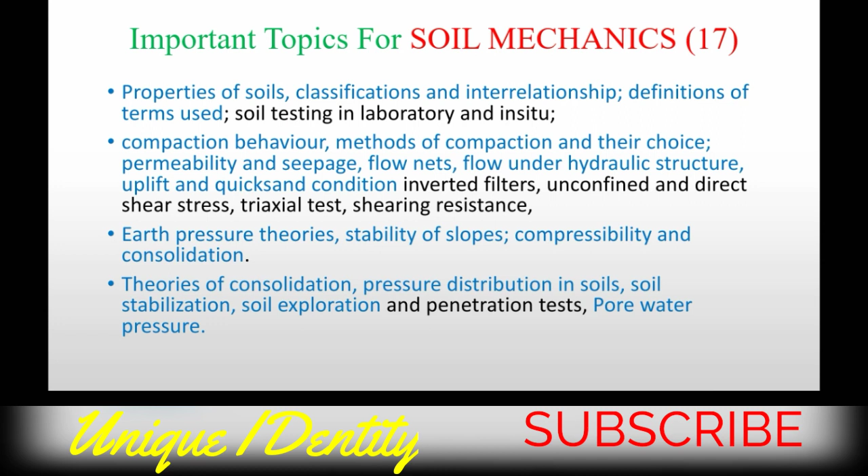Please revise related questions on these topics from this subject. Next is foundation engineering. As I told, soil mechanics plus foundation engineering, total 17 questions may come. So in foundation engineering, foundation type, selection criteria, bearing capacity, settlement, laboratory and field tests, code provisions, types of pile - these are mainly important things. Please revise these topics in foundation engineering.

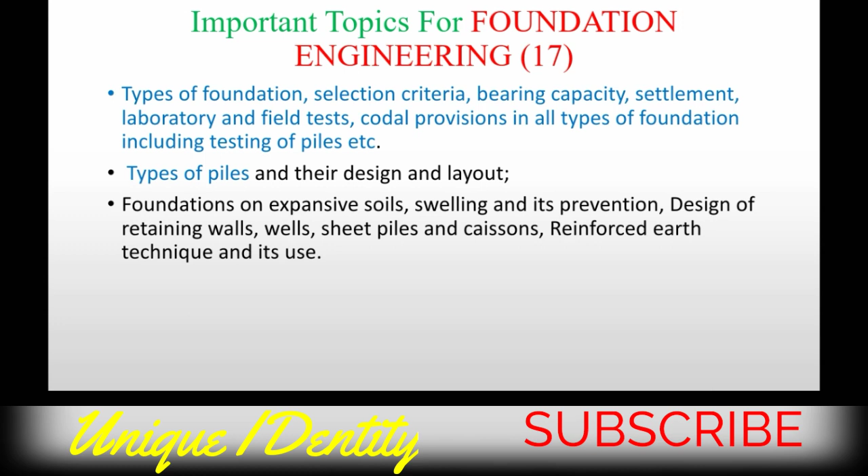Next is environmental engineering. As I told in my previous video, approximately 14 questions may come from this environmental engineering.

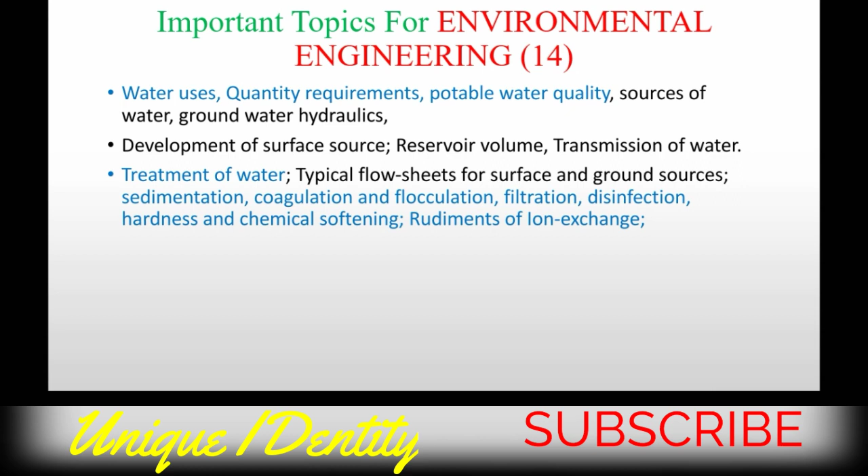First, water supply engineering. Here, water uses, quantity requirement, potable water quality - these are the main topics. Also treatment of water: sedimentation, coagulation, flocculation, filtration, disinfection, hardness and chemical softening, rudiments of ion exchange. These are the main topics for this water supply engineering.

Also principle and methods of design of distribution system, as you know - gridiron system, T system, circular system, ring system. So these systems are mainly important.

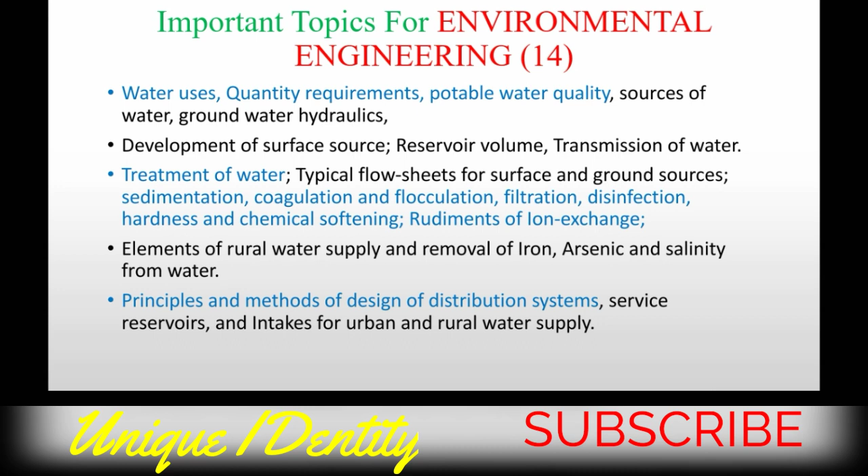Next, another topic is wastewater engineering. So here, sanitary wastewater, storm water runoff, quantity estimation, sewage system, sewer appurtenance, characteristics of domestic sewage, typical flow sheets of primary and secondary treatment, screen, grit removal - these are the main topics.

Also you can read sedimentation, biofilter, activated sludge process, septic tank. Again, I am telling you all these topics have come from the previous years, so mainly from these topics questions may come.

Next is pollution. Type of pollutant, natural and man-made sources, effects of air pollution, unit systems, rudiments of control method, elements of noise pollution, community solid waste, sources and quantity characteristics, method of disposal, reuse and recycling - just like composting, sanitary landfill, incineration. So these are the methods of disposal. All these are important for environmental engineering.

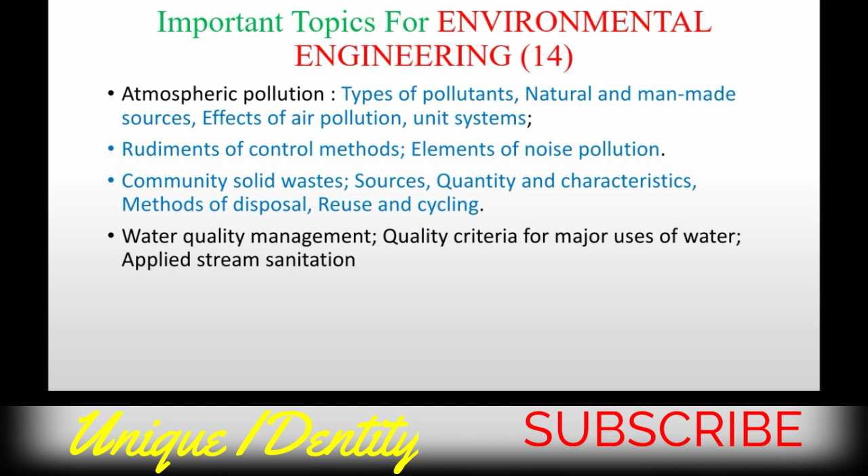Next is water resource engineering. As I told you, approximately 10 questions may come from this water resource engineering. First is hydrology: runoff and stream flow, measuring techniques, computation, hydrograph computation and interpretation, groundwater estimation, measurement and characteristics - these are the main things.

Next is irrigation engineering. From irrigation engineering there are so many important topics: type of irrigation system and their detailed description, soil water crop relationship, types of soil, water requirement of crop, delta and duty, river training works, irrigation channel, design principle of irrigation canal, drainage channel, navigation canal, canal linings, canal outlet, water logging. Please give stress on these topics from irrigation engineering - these are very much important.

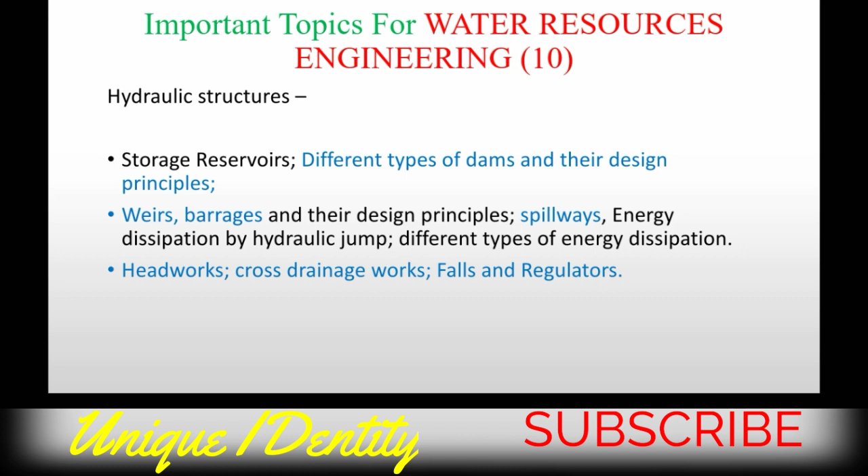Next is hydraulic structure. From hydraulic structure, different types of dams and their design principle - you may not read design principle in detail, but have an overview of tension, compression effect, eccentricity, this you should know. Weir, barrage and spillways are different - a must question from this. Headwork, cross drainage work, falls and regulator. Also you can read super passage, aqueduct, siphon aqueduct. So these are mainly important for water resource engineering.

Next is fluid mechanics and hydraulics. From fluid mechanics and hydraulics, all the topics given in the syllabus are very much important, so that is why I am not describing all the subtopics - you should read all the things, because questions may come in depth from fluid mechanics.

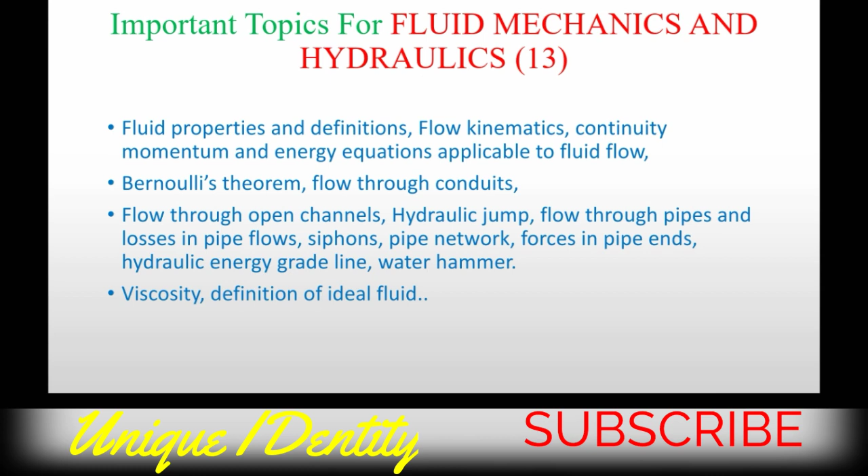So from fluid properties to viscosity and definition of ideal fluid, all the things are important. Please read it in detail. Revise it in detail.

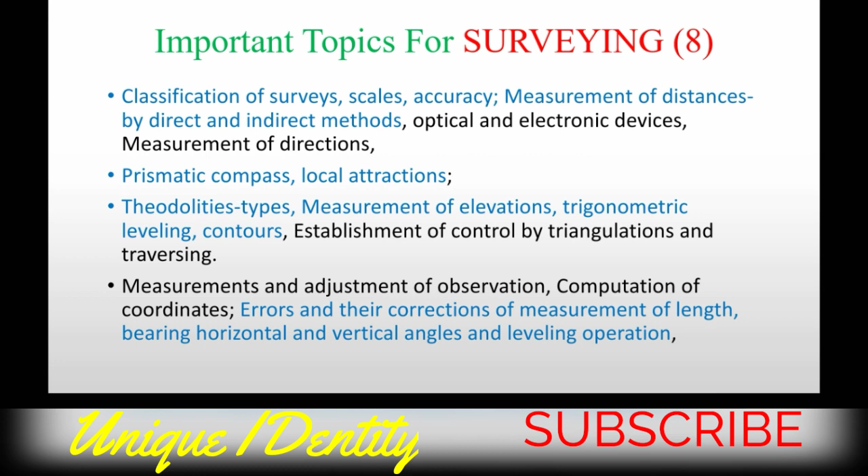Next is surveying. From surveying, classification of survey, scales, accuracy, measurement of distance by direct and indirect methods, prismatic compass, local attraction, theodolite types, measurement of elevation, trigonometric leveling, contours, errors and their correction of measurement of length, bearing horizontal angle and leveling operation.

Simpson's 1/3 rule or trapezoidal rule - please read this chapter also. And in surveying, approximately 8 questions may come.

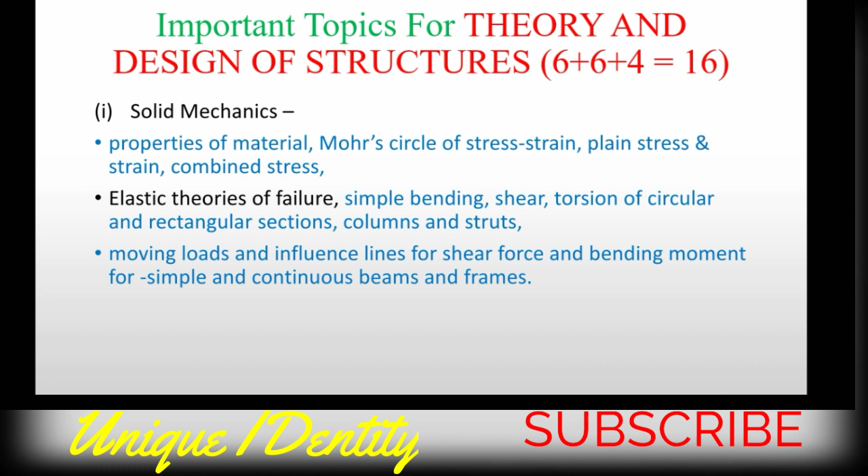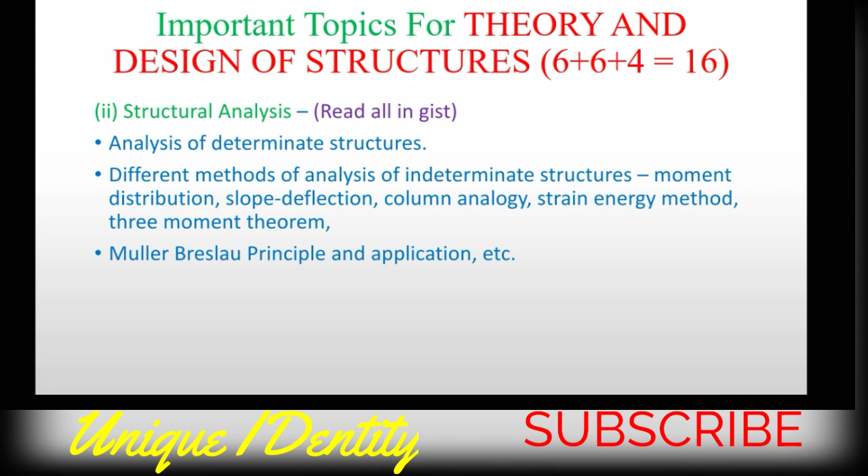So next is structure analysis. Read all in gist - so not in detail but read all the topics in gist. So from strength of material plus structure analysis total 6 questions may come.

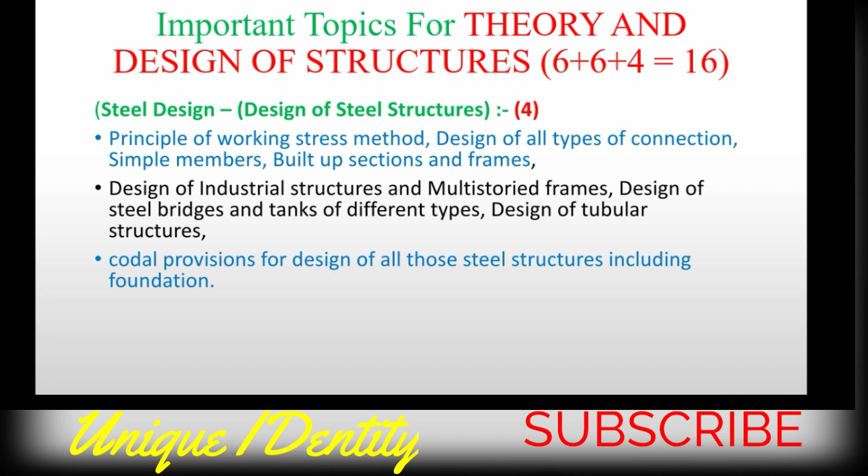Next is steel design. Steel design - principle of working stress method, design of all types of connections, simple member, built up section and frames, and codal provision for design of all the steel structure including foundation, principle of ultimate load design, plastic design of continuous frame.

This may not be important but you can at least once revise it. So from steel structure there will be 4 questions, and I forgot to mention that in structure analysis, degree of freedom is a very important thing, so please revise that also.

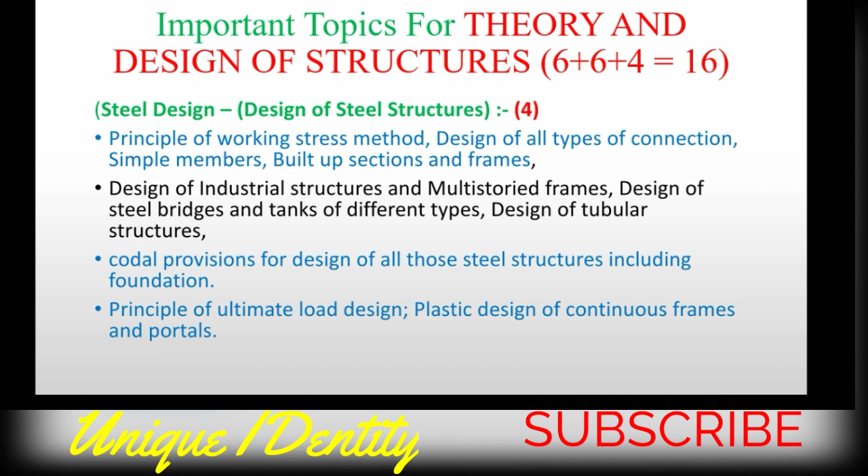Next is RCC design. From RCC design 6 questions may come, and here limit state method of design, codal provision for design - in RCC, IS 456 is a very important thing to be revised. Similarly for steel structure, IS 800 is very important to be revised.

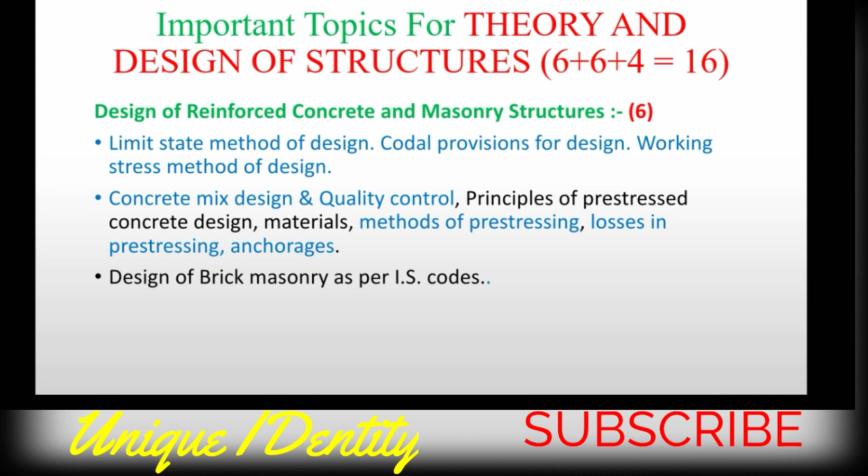Next, working stress method of design, concrete mix design, quality control, methods of pre-stressing, loss in pre-stressing and anchorages. These are the main things to be revised for RCC design.

So from building materials 9 questions may come, and similarly for construction planning and management 2 questions may come. From here: bar chart, link bar chart, work breakdown structure, activity on arrow diagram, critical path, probabilistic activity duration, event based network, PERT network and crashing.

These are the main topics. But sometimes resource allocation, time cost study, or rescheduling of construction program may be asked in interview. So read carefully and revise carefully.

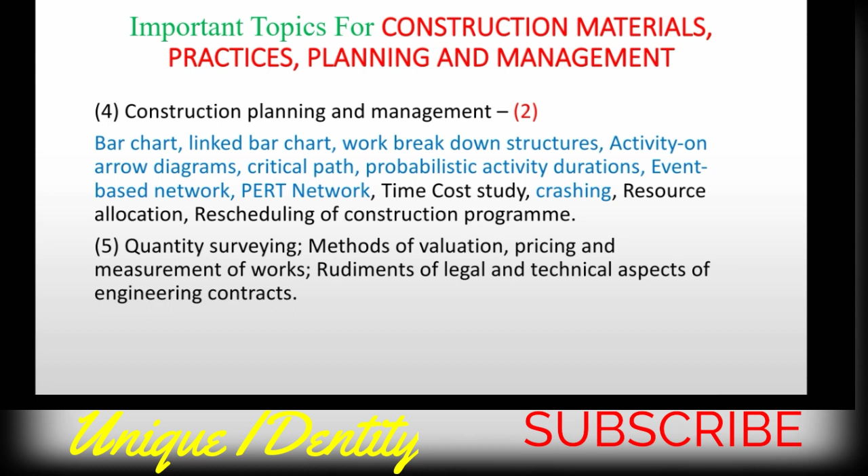This quantity surveying may not be asked because in previous years also this quantity surveying has not been asked. But if you have read it, it is very welcome to read this. But for the last minute, if you are searching for what is best to be revised, so these are the main topics.

So this was today's video, and I will upload in the next video the topic of examples of some repeated questions from previous years. As I told you previously, there are some questions which are repeated in previous years also, so some question may come from that repeated question. And some last minute tips for the examination hall which will be very fruitful to you.

So that's all for today. Please keep your preparation well and study well. Just read and practice so many MCQs from different books, and also previous year different state PSC questions, that means UPPSC or RPSC, OPPSC - this type of state level PSC question you may revise.